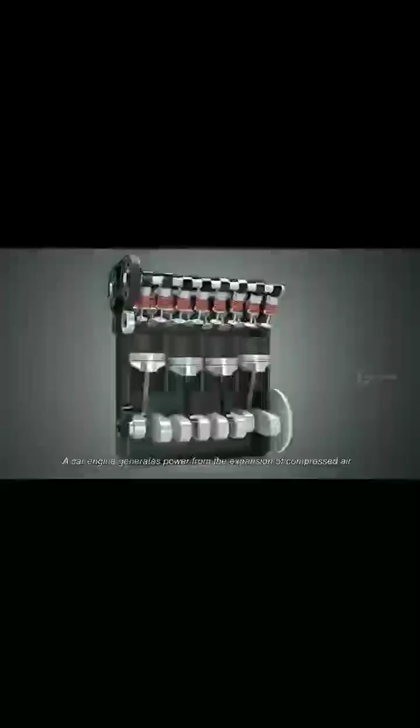An engine generates power from the expansion of compressed air in a contained cylinder with the help of fuel. That is why it's called an internal combustion engine. Before getting into the working, let's see the main parts involved in the working of an engine.

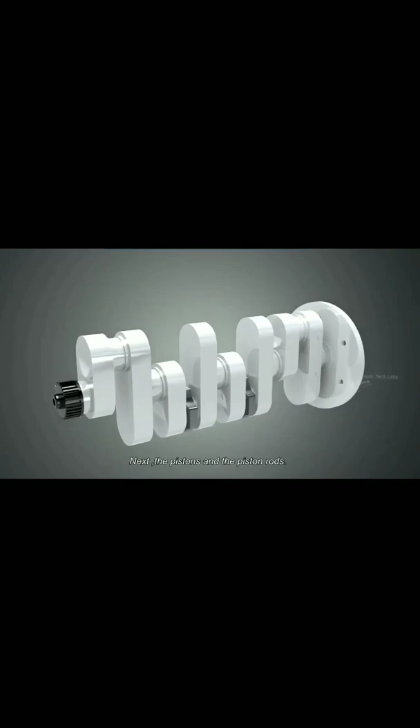First, the crankshaft. This is the part which converts the linear motion of the piston to a rotational force. Next, the pistons and piston rods. The pistons will be pushed down by the expansion of compressed air, and turn the crankshaft.

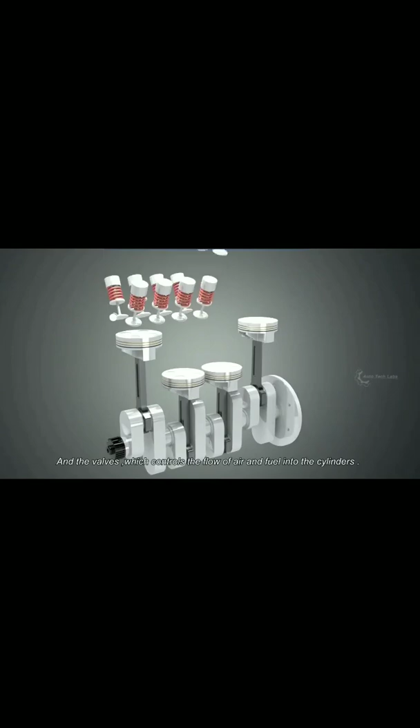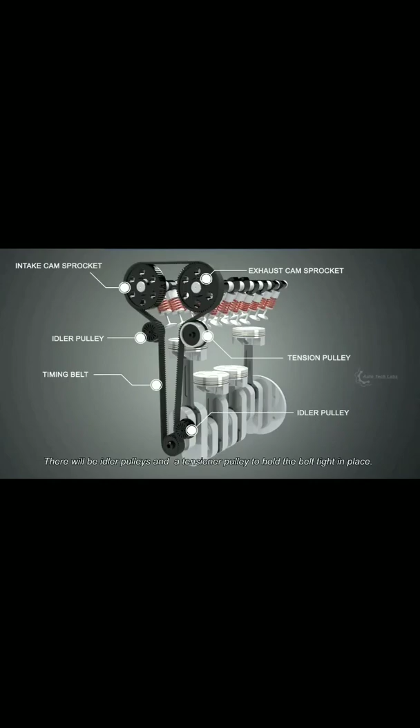And the valves, which control the flow of air and fuel into the cylinders. These valves are driven by the intake camshaft and the exhaust camshaft, and the camshafts are driven by the crank itself, using a timing belt. There will be idler pulleys, and a tensioner pulley, to hold the belt tight in place.

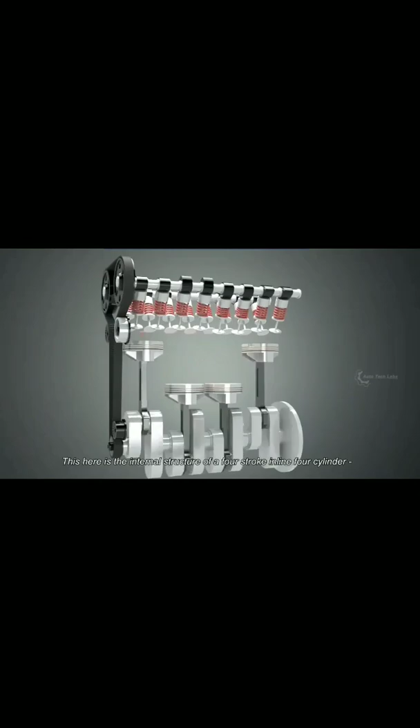This here is the internal structure of a 4-stroke, inline 4-cylinder, DOHC engine, which is commonly found in most hatchback and sedan cars. A 4-stroke engine should pass through 4 different strokes to complete one cycle to produce power. They are intake, compression, power, and exhaust stroke.

The crank to camshaft ratio is 2:1, which means it will take 2 crank revolutions to complete 1 camshaft revolution. And the camshafts are designed in a responsive manner, to open or close based on the corresponding strokes of each cylinder. Let's take a look at a single cylinder, and see how a 4-stroke engine works in detail.

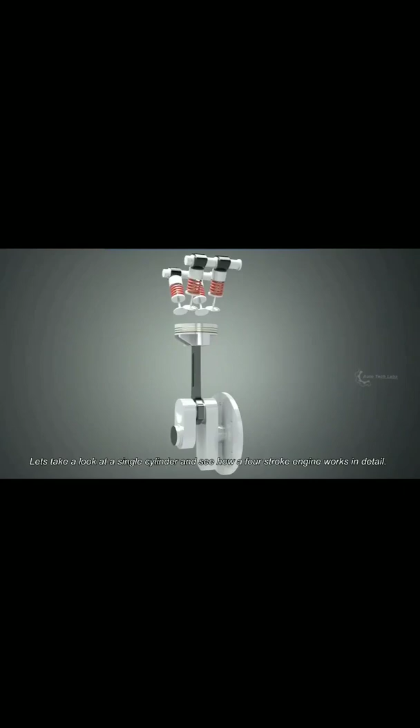In order to ignite the air-fuel mixture, a spark plug is used. This will ignite the compressed air-fuel mixture, with the help of an electrical spark.

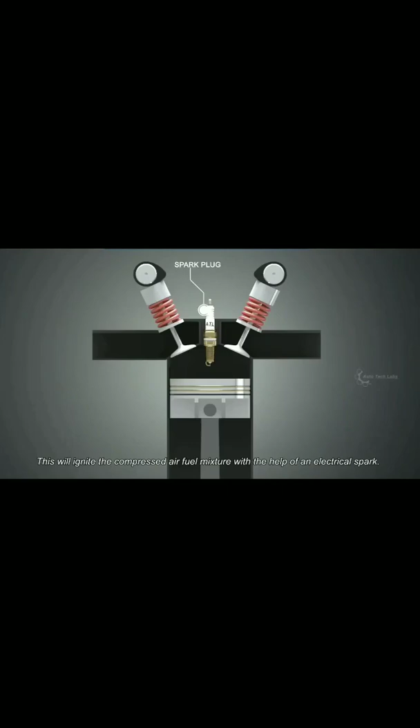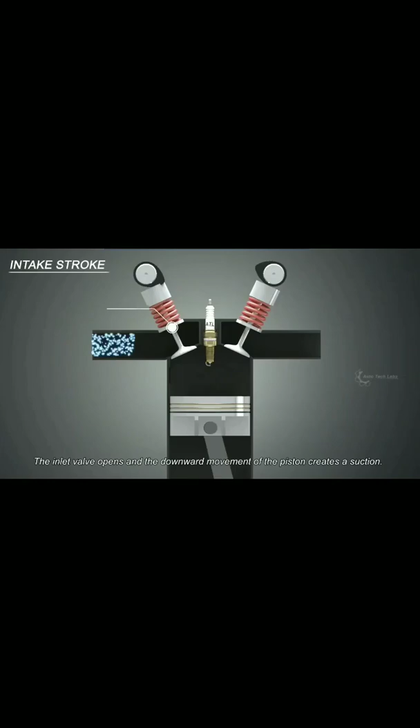We will take it down by each stroke. The intake stroke: the inlet valve opens and the downward movement of the piston creates a suction. This pulls the air-fuel mixture into the cylinder.

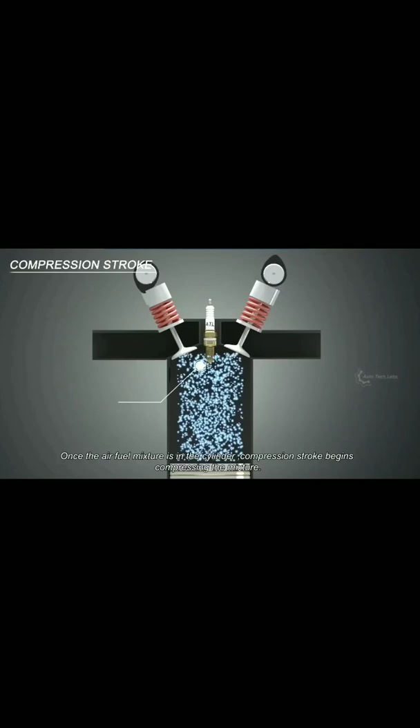Once the air-fuel mixture is in the cylinder, the compression stroke begins, compressing the mixture. At this time both inlet and outlet valves stay closed.

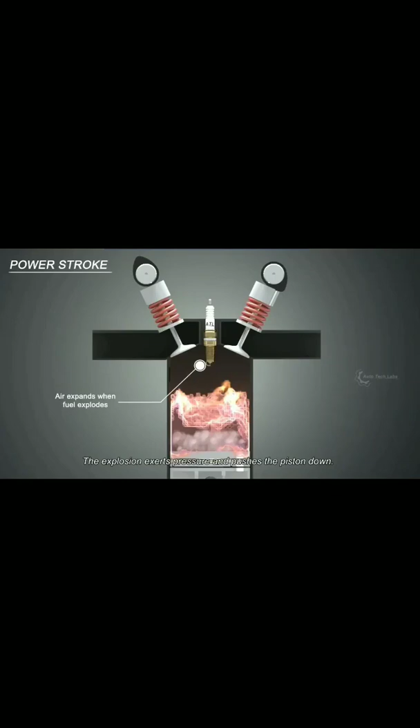At the end of the compression stroke, the air-fuel mixture is ignited by the spark plug. The explosion exerts pressure and pushes the piston down. This is the power stroke which produces power to the crank.

At the exhaust stroke, the outlet valves open and the piston pushes out the burned gas. The cycle starts again from the intake stroke, keeping the engine running and producing power.

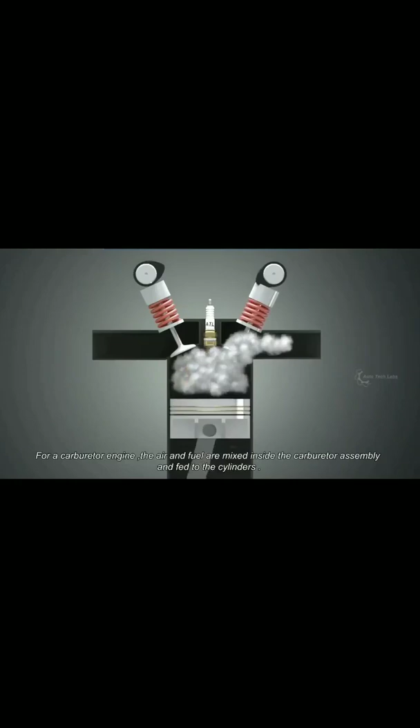For a carburetor engine, the air and fuel are mixed inside the carburetor assembly, and fed to the cylinders. In the case of a fuel-injected engine, the fuel is injected into the intake manifold, or directly into the cylinders.

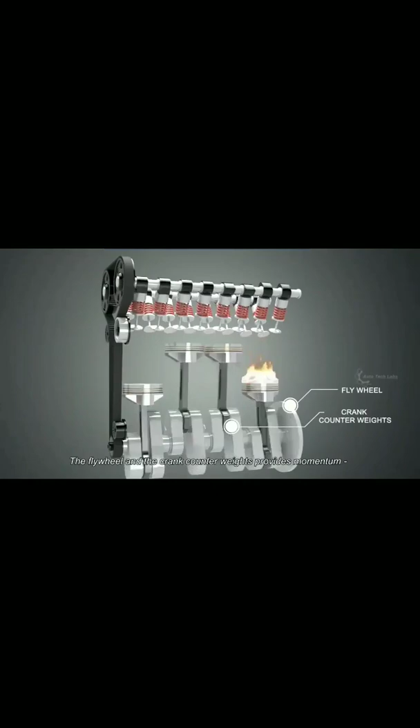Since only a power stroke produces power, you may wonder how the engine turns continuously. Well, the answer is in the crank itself. The flywheel and the crank counterweights provide momentum, which keeps the crankshaft from stopping immediately.

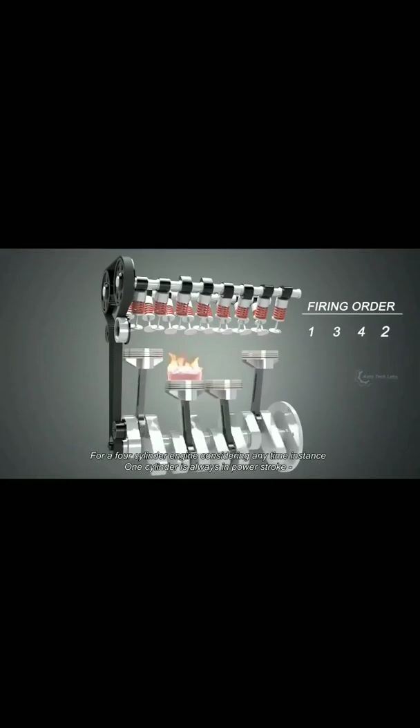For a 4-cylinder engine, considering any time instance, one cylinder is always in power stroke, which produces more power and less vibrations compared to a single-cylinder engine. And that is how a car engine produces power, in simple terms.